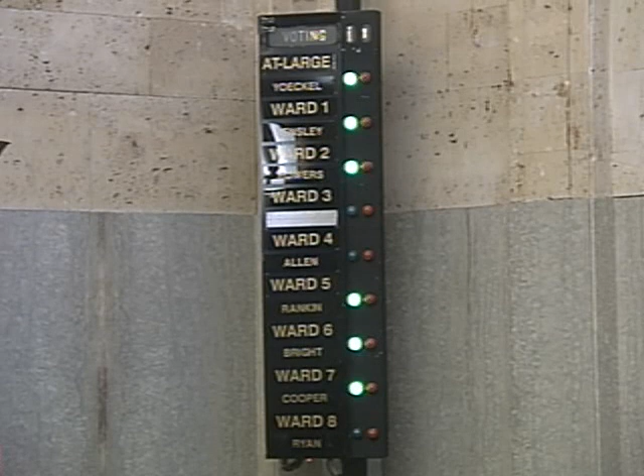We've also received 3 new requests for continuance: item B9 for SPUD 966 to be withdrawn, item B10 for SPUD 967 to defer to August 24th, and item B14 for PUD 1645 to defer to June 8th. Is there anyone who came to talk to us today about items 9, 10, or 14 on our agenda? Move for continue. Second. We have a motion and a second to approve the additional continuances. Cast your votes, and those are approved.

Are there any continuance requests from the public today? If not, we'll go to the consent docket, and if it's agreeable with the commissioners, I'd like to include item 5 in the consent docket. As I read the case, it's probably where it should have been. Do you need a motion to do that? I've got a question on item 1, 3, and 5.

It's a clarification, and I think it'll all go smoothly, but I've got a question on those 3. I'll move case items 2 and 4. The consent docket is now items 2 and 4. I'll take a motion. Move approval of 2 and 4. We're voting to approve 2 and 4. Cast your votes. Those are approved.

Back to number 1 for Mr. Bright. Is the applicant here? Item 1 for the record is C6896, the final plat of Cedar Ridge at Morgan Creek, Section 3. Good afternoon, Kendall Dillon with Crafton Tull, representing the applicant. This is about the 4th final plat. It conforms to the preliminary plat, we agree with the TEs, and I'll answer any questions.

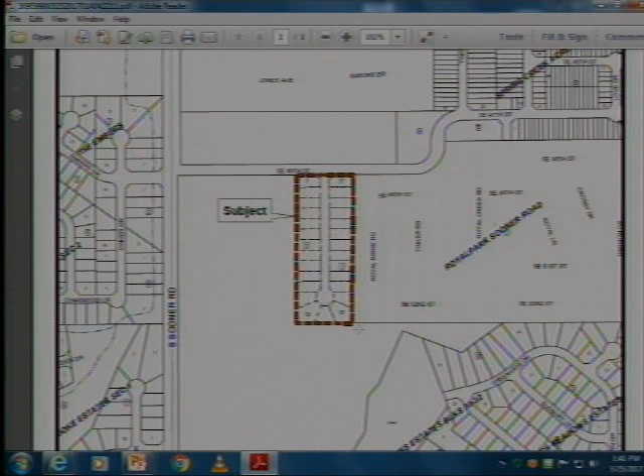Okay, I'm going to break my own rule here. I have just a comment to make. I'm a little concerned about the number of these single strip, cul-de-sac subdivisions that we're seeing. I don't think we ought to get in the habit of that, for what it's worth. I don't disagree. I mean, it's just a strange piece of dirt to be turning into a subdivision. Nothing prevents it in the subdivision regulations or the zoning ordinance, however, so as Terry knows, other than saying it's not what we'd like to be seeing, we're going to see some of them as people have these kinds of lots.

It does not require a variance, is that correct? I move approval. We have a motion and a second to approve item 6. Cast your votes, and it's approved.

Thank you. Item 7 is SP 492, a special permit application for a telecommunication tower at 6420 North Meridian Avenue.

Good afternoon. Tracy Malone, Falcon Foster, here for U.S. Cellular. Thanks for continuing this matter to today. We now have the FAA determination of no hazard to air navigation. The FAA has reviewed this proposal and deemed it appropriate. We don't have any lighting or marking requirements for this one either as it relates to the FAA.

This is an application for a special use permit because we need an exception to the wireless ordinance to install a 100-foot wireless tower approximately 250 feet away from an existing 80-foot Crown-owned tower. The Crown-owned tower has an available attachment height of 60 feet. U.S. Cellular needs 100 feet. So this is an exception to the tower-to-tower setback.

Currently, U.S. Cellular is operating a rooftop antenna facility across the street at Lake Park Center. U.S. Cellular needs to relocate to meet updated FCC requirements for its operating license. These updated requirements are Lake Hefner and Highway 3 data coverage. Staff has asked for proof that the Lake Hefner and Highway 3 coverage can't be obtained at the Crown-owned tower, so I've provided that in the materials before you and in the record.

Essentially, the proof is the top position of 80 feet on this Crown-owned wireless tower that exists is occupied, and the top position available is 60 feet. So that would be a 60-foot attachment height for U.S. Cellular, 40 feet less than what they're asking for. It offers 25%, or one-fourth, of the coverage that the 100-foot attachment height pole would provide.

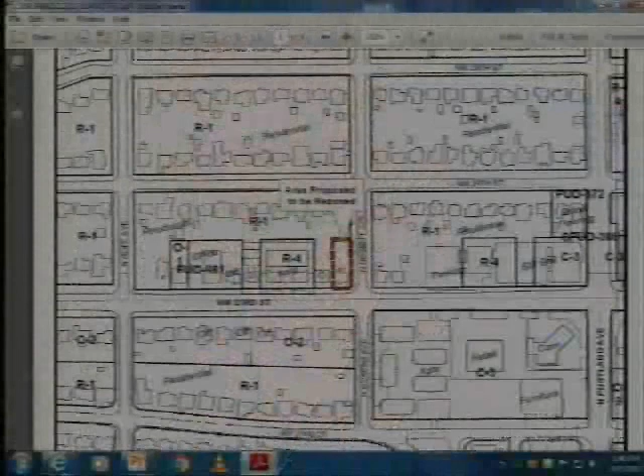My name is Flori Quiros, and I have a renting house. I want to transfer to a small business, like a barber shop and office renting.

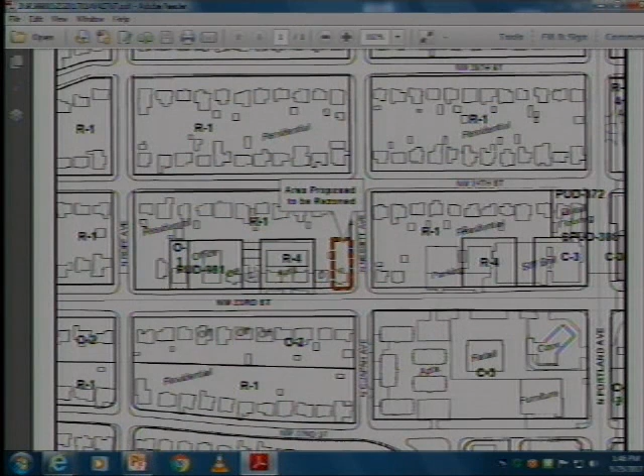Janice, do you want to weigh in on this? I met with Ms. Quiros, and we've gone through her application. We're going to make a few changes to it. We're going to narrow the uses to just two: convenience sales and personal services, further limited to a barber shop,

and administrative and professional offices. There's going to be only one point of access onto Nesbitt Avenue per the TE, and there'll be just one non-illuminated accessory sign, not to exceed 100 square feet, that will not be on the Nesbitt Avenue frontage. And she will install an 8-foot-high sight-proof fence along the northern boundary of the property. I have those for you if you need them.

I'm not a big fan of residential conversions. I really wrestled with this one. Staff was very helpful, and we talked through some limitations that would make it more palatable. The location is very specific — she owns the property next door to the west and lives there. So where it is situated, I'm hoping it will not be a domino effect along the north side of Northwest 23rd Street the way the south side is.

So with those changes, which she's agreed to, is there anybody who wants to be heard on this subject? No one has signed up.

Janice, the two uses are limited to what? To convenience sales and personal services, further limited to a barber shop, and then administrative and professional offices.

Tim Johnson with Johnson Associates, here on behalf of the applicant. For those familiar with this area, this is the ongoing renovation of the Page Woodson area. The tract to the east of this subject tract is under construction and reaching completion of units that are multifamily units specifically designed for the college students at the medical center. And this PUD, or SPUD, is a mirror of what's been approved on the other one.

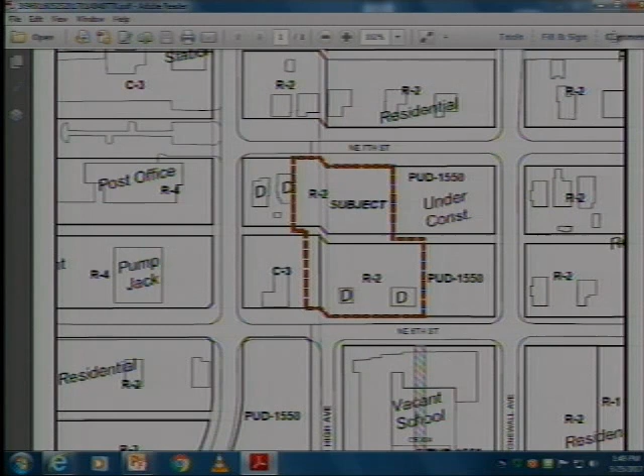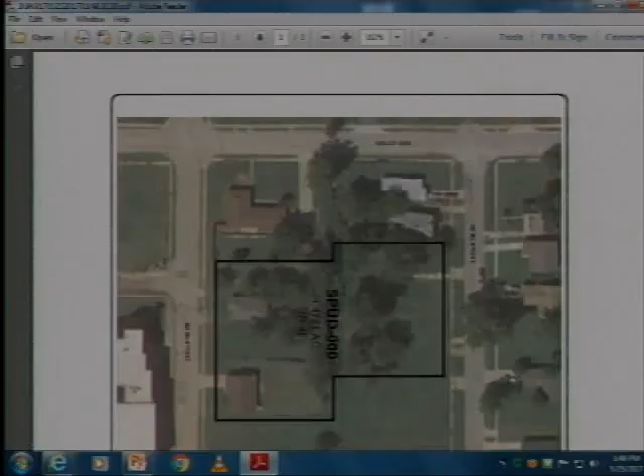Councilman Cooper had asked about why we didn't include the lots west of us in the north half of the block. Something we did when we first started and rezoned the original plat or parcel was agree that neither the developer nor urban renewal would approach any neighbors. The development of this tract came about because two neighbors — one was in probate and the other an elderly woman who wanted to sell — approached us, and we were able to negotiate and purchase the land between urban renewal's properties. So it allowed us to collectively put this together and expand the project.

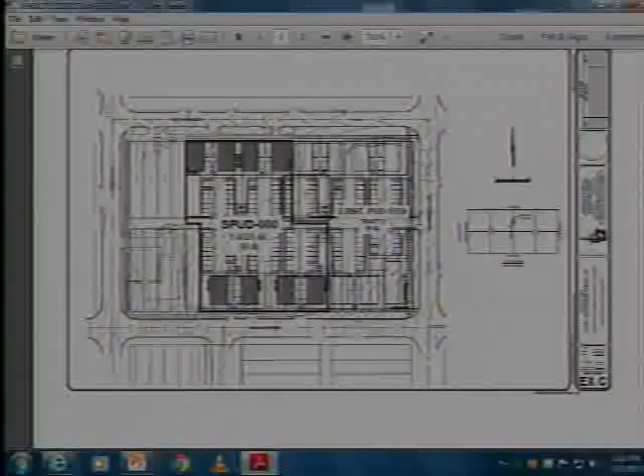The one thing I'll point out is that one of the points staff made is concern about landscaping. We do plan heavy landscaping on these — we've hired a landscape architect, and he's working on this Phase 2 now. The permit for Phase 1's landscaping has been submitted to the city and is under review. And as you know, that construction is going fast.

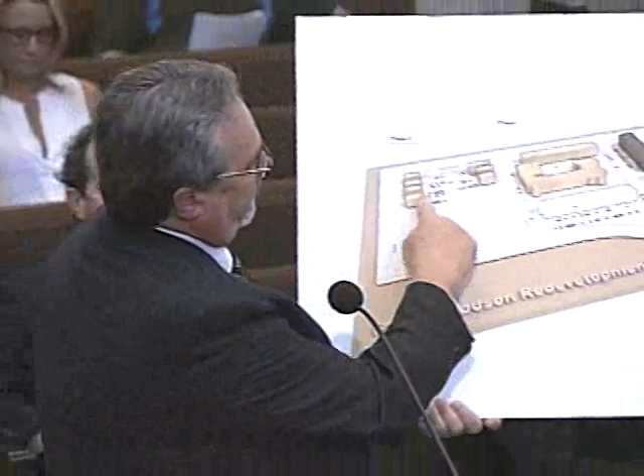It does fit into the overall master plan that was in the original zoning. This plat parcel, which is the phase under construction, and all of this was under the master plan of the original PUD. So this piece is filling in this portion of the block.

The height of our building next to the residential meets the two-story height limitation of 35 feet, measured to the midpoint on the roof. So we're not really any different than if somebody wanted to build a two-story house there. And I agree with all the TEs that are in the report.

Is there any limitation on the commercial uses, that they be accessory to the residential development? Some of the uses are not things I would want to see built there independently of this kind of residential use. That's a good question. I think the intent, and we did mirror this, and I probably should have taken those commercial uses out, because there's no commercial planned in this phase. The only commercial was in the previous phase, in the corner building on the southeast corner, in conjunction with the rentals.

So can we take them out now? We can take them out. I like that idea.

I think this is a really, really needed and good project, particularly for this area, which is still redeveloping. Tim and I discussed the uses, some of which I would not have wanted to see, but I don't exactly know how all of the area is really going to end up developing. I thought it would still be a good project. So I'll move for approval.

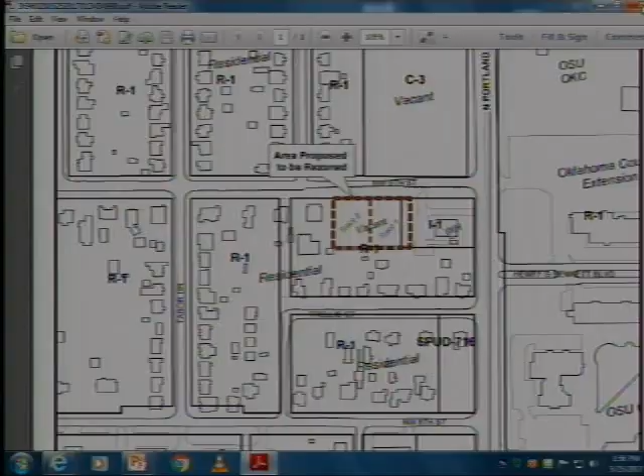Yeah, they all are. No one has signed up. Second. We have a motion and a second to approve item 12. Cast your votes. And it's approved.

Thank you, can I ask one more question? I had the neighbor call me, and he was not opposing this, but it shows that at some point there was an area to be vacated to widen that road, and I guess OSU was supposed to do it, and it's never got done. I think that was his only concern—he wanted me to let everyone know he wished it would get widened. Well, thanks for pointing it out, but we'll leave it to staff to solve.

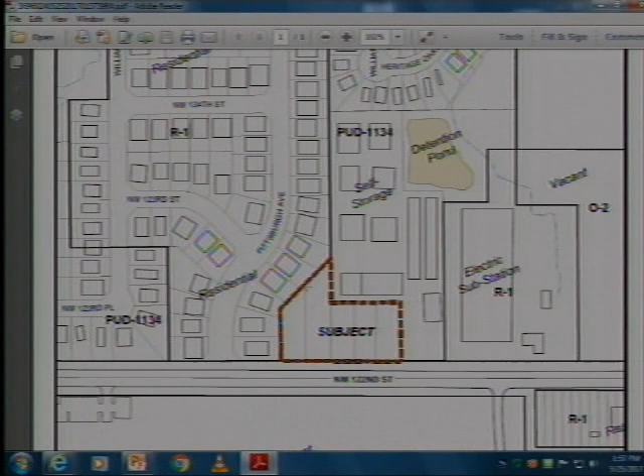Item 13 is SPUD 980, to rezone 1409 through 1425 Northwest 122nd from PUD 1134 to SPUD 980. Good afternoon, David Box, 522 Colcord Drive, here on behalf of the applicant. This is a spud on Northwest 122nd Street between Penn and Western. What we've provided for is a C1 base with limited uses. There are two TEs, both of which we agreed to.

We've got a tract that's kind of in an odd spot because we've got an electrical substation to our east, personal storage to our north. Obviously, we can't have any residential fronting on 122nd Street, so what we're trying to do is provide some limited commercial. We think we've done that with the limited uses in our spud. So we agree to the TEs, and I'd be happy to answer any questions.

Commissioners? No one signed up. Move approval. Second. We have a motion and a second to approve item 13. Cast your votes. And it's approved.

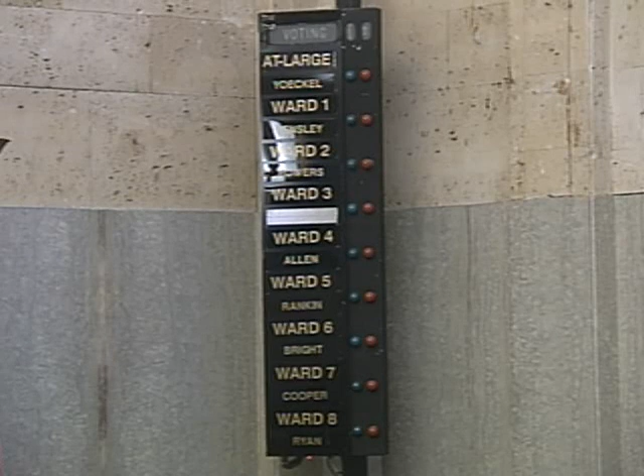Thank you. Item 14 was continued. Item 15 is a comp plan amendment, 2017 number 4, to change the land use typology from rural low intensity to rural medium intensity, northeast of North Douglas Boulevard and East Memorial Road.

Hi, good afternoon. I'm Ken Bryan with the Oklahoma City Planning Department. I want to walk you through a couple of the pertinent items from the staff report on this requested comprehensive plan amendment.

As the title indicates, we're looking at going from rural low to rural medium, and there's an associated rezoning for RA2.

Taking a look at our land use typology map and providing a little context of where we're at, we're way up here near Lake Arcadia, actually adjacent to the city of Edmond, just north of the Turner Turnpike.

Here's a look at the site in some detail. It's about 130 acres in size as far as the comprehensive plan amendment area is concerned. It includes out to the center of Douglas Boulevard and to the center of the turnpike there to the south.

We'll look at some additional details that are pertinent to this site and its given land use typology. So the site's designated rural low. Rural low is appropriate for large lot rural subdivisions, 5 acres and larger in size typically. A limited amount of commercial, light industrial, and ag uses are also appropriate here.

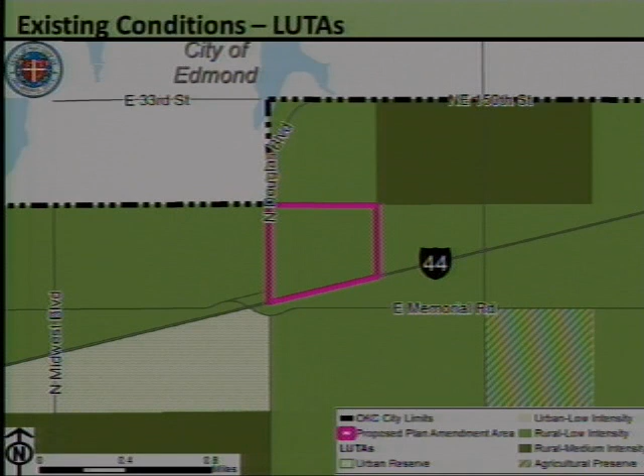That contrasts with the rural medium intensity in terms of the lot size. Rural medium allows for slightly smaller lot sizes down to 2 acres, and we like to see those near a fire station. If you're going to put more lots and more uses, it would be good if those had more access to fire, and we actually have a rural response time map for fire to take a look at.

The site's mostly covered by upland forest. Upland forest is one of our environmentally sensitive areas in Plan OKC. There's provisions in the plan for taking care of the forest and preserving those as appropriate.

Sites or specific land use in the area - there's rural residential on 2 sides. There's a lot of undeveloped tracts out here that haven't been platted or divided into lots really in any way, which you would think is expected given the rural nature of the area.

So looking at major services, of course it's rural, so there's no immediate access to public water or wastewater, and it's beyond the preferred response time for rural areas of the city. Let's take a quick look at that - it's an important component of this area.

I had to zoom out quite a bit here so we can see these 3 fire stations. It's about equidistant from 3 fire stations, winding up being a little over 6 miles from each one. So you're in that red zone there that is outside our response time target for rural areas. The orange is the response time target for rural development in Oklahoma City.

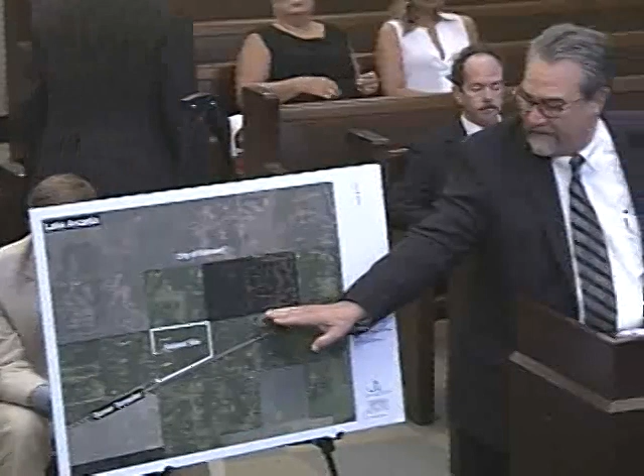So as Ken showed on his map, this is medium now. This is where that project I just mentioned is, there's 160 acres here. This is zoned to be 2-acre tracts. It was zoned much longer before we did this. Our subject tract is in between medium and an urban reserve over there, that triangle south of the turnpike, which is a little unique because there's no sewer or water over there.

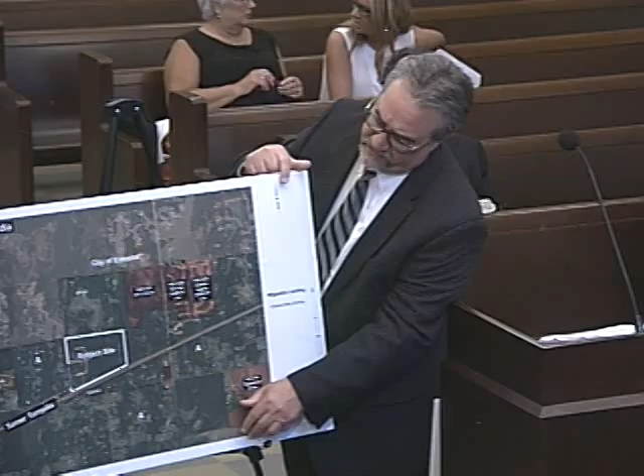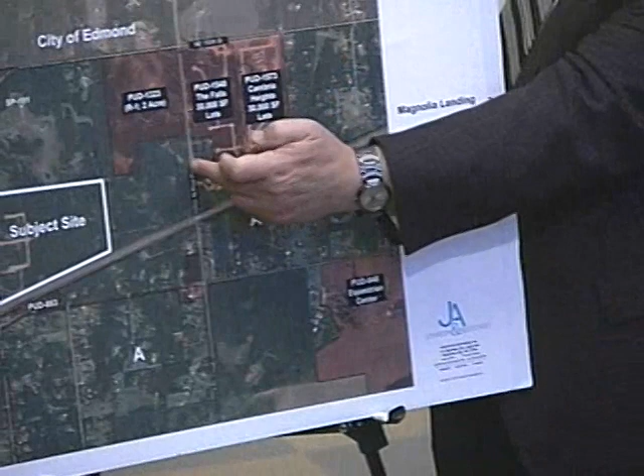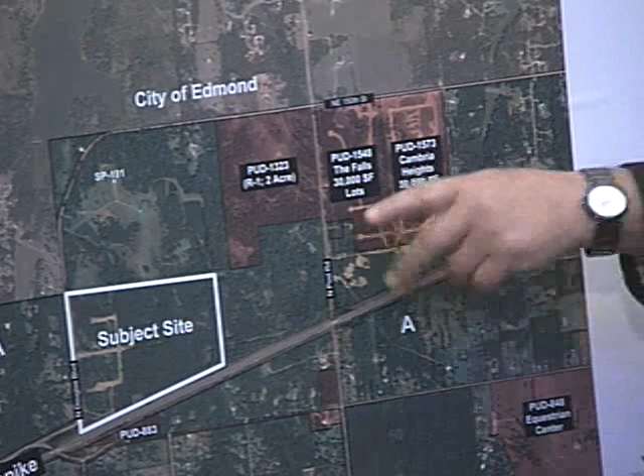So the zoning pattern in the area, and again right now I'm just talking about Oklahoma City, as you can see there's been a lot of PUDs. The area I was mentioning, there's a tower right here. There's public Oklahoma City water here, connected to the Edmond treatment plant through an agreement the city did a number of years ago. The PUD across the way is older, but there are small PUDs all over the place here. There's an RA zoning over there. And here's how it impacts what we think the change that should be made in this area.

So what you see on this map is we've included Edmond because the development around Lake Arcadia under Edmond criteria is 2-acre subdivisions. We're proposing a 2-acre subdivision. The area over here where the public water is in blue, those are 30,000 square foot lots, and the reason they're so small is because there's water there. This area over here has actually, it's one of the old cluster zonings because it has densities that can be as dense as R1, as I believe it's written, but it's an average of overall 2 acres.

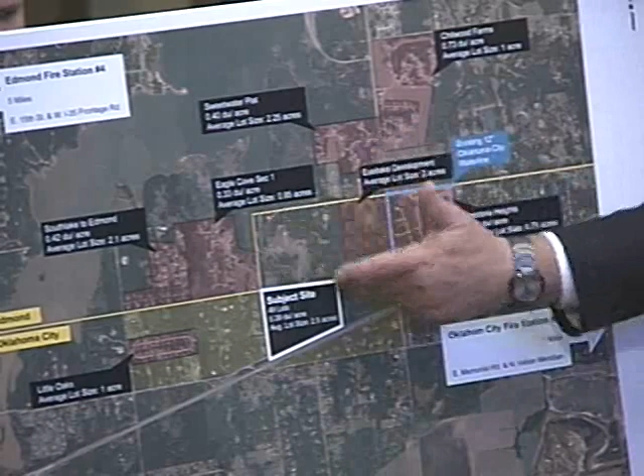All these developments north of the city limit line are all 2-acre subdivisions that exist today. The area in yellow is fully developed, was developed a number of years ago, those are 5-acre tracts. This is the only piece undeveloped between 2-acre developments surrounding it. We believe the development pattern out here is very distinct and very much developed. This is developed, this is developed. As you go that way, there's much smaller lots developed. So this is really the only area that's, in my mind, a question, and part of that is already medium.

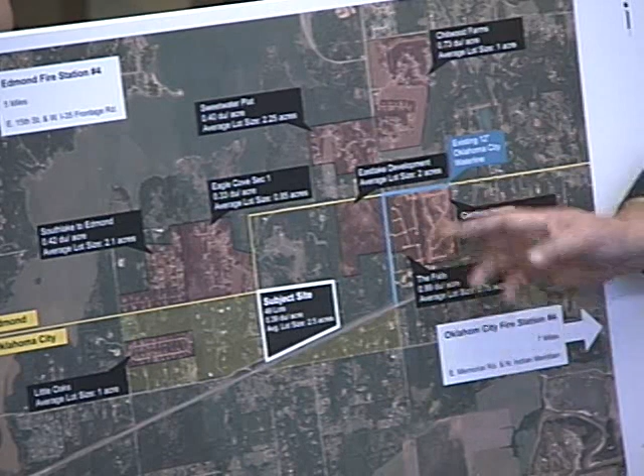We believe not only would the plan need to be changed for this tract, but I think this is an up-and-coming development tract as well as this. More than likely, you'll see an application on this for 30,000 square foot lots because it's abutting a water line that's already been built, and Oklahoma City is maintaining that. So that's kind of the basis of our case.

The other things staff has expressed concern about, and the OKC plan covers, is that we're concerned about this forestry area, and we've taken that into consideration. Although we're asking for a straight RA2 zoning, our developer is committed to putting covenants as well as notes on the plat with regard to how much you can clear on your lot, and intends on enforcing that. Those of you familiar with Stone Mill, I developed that with David Yost many years ago, and we've maintained that streetscape provision, and that's what this developer wants to do.

We're not going to tear out trees 60 feet wide to put a street in. We're going to tear out just enough room to put the street in. There won't be any water or sewer, so we're not going to take any trees out for that. All public utilities will be in the street, so we can minimize the damage we do to the trees and the forestry there. What the OKC plan aggressively asks for on 100% covered land is to maintain 60%. We are, with this plan, using a 40% lot coverage, which is high. We can maintain just a little over 60% of that.

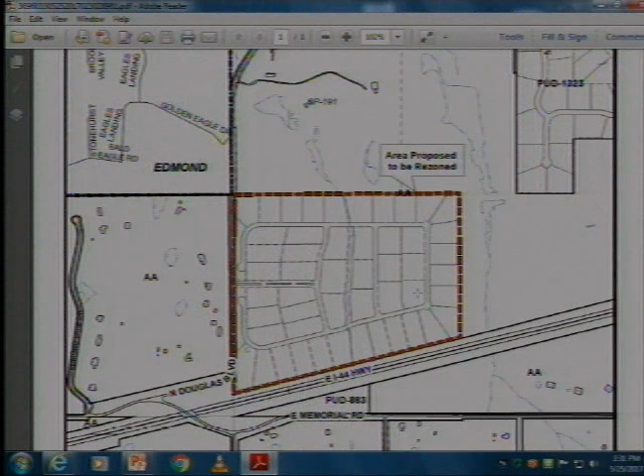Is that the legal property adjacent to this one, that may be in question about the boundaries? Yes. On the north side of the proposed subdivision, my client, Yellis Family Trust, owns the property immediately north, and there's a dispute not yet resolved. We filed suit to try to resolve it, but my client doesn't want any part, whether it's a 10-foot strip or a 100-foot strip, rezoned. We get the point. Thank you.

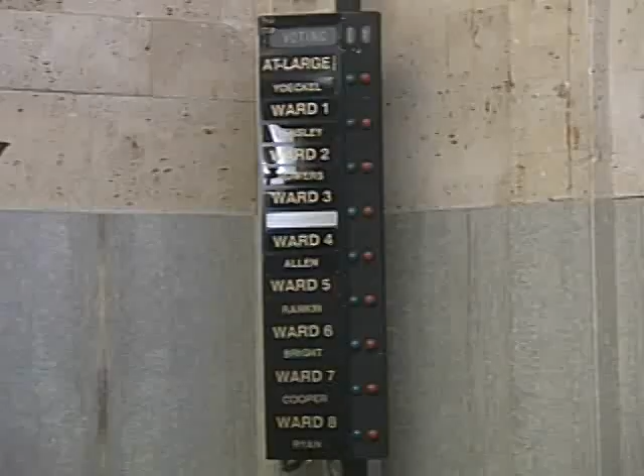Make a motion to deny. Second. We have a motion and a second to deny item 16. Cast your votes. That's denied.

Need a motion on item 17? Also making a motion to deny. We need to continue the plat, since it's not valid without the zoning. So we'd like to put it on indefinite continuance. We'll continue indefinitely so we can get new notice out. Second. We have a motion to continue item 17 indefinitely. Cast your votes. And that's approved.

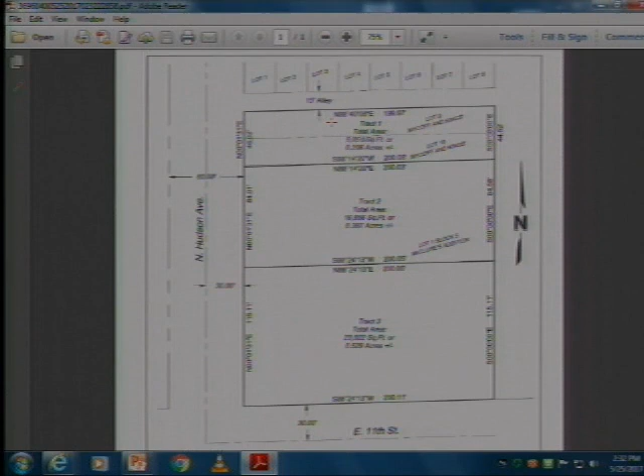Item 18 is V16, a variance request to extend a water main to a property located at 1204, 1210, and 1214 North Hudson Avenue. Is the applicant here?

Is there any reason why we would continue this? No, and no reason we would deny it. No reason to deny it. I'll move approval then, approval of the variance. Okay, we have a motion and a second to approve the variance to item 18. Cast your votes. That's approved.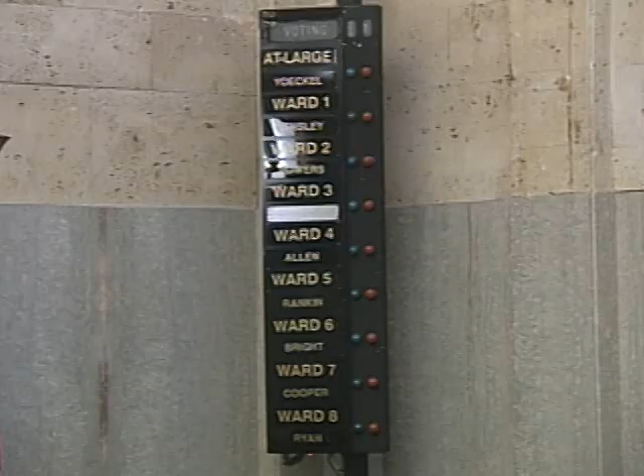And item 19 is case C6888, the final plat of Ashton Court, Phase 1. Hi. Didn't know I'd be back so soon. You missed me. Yeah, this is the final plat of the first phase of Ashton Courts.

We've mimicked the preliminary plat and agree with all the TEs. We've been working with Public Works staff on a resolution to the sight distance solution, and we've come to an agreement on that just today, so we're thrilled to put this forward. We've agreed with Public Works that we'll present our final resolution per their comments on our paving plans for final approval by Public Works on paving.

But we're leaving the TE in for now, right? I think it stays, that's fine. I think so, because we'll resolve it under... are you talking about TE4? Yeah, you can leave it. Yeah, that's what was just said.

And we don't have to worry about the variance that was provided earlier in the preliminary plat, do we? Access to Sara Road? That had to do with the separation. Yep, okay, that's what I thought.

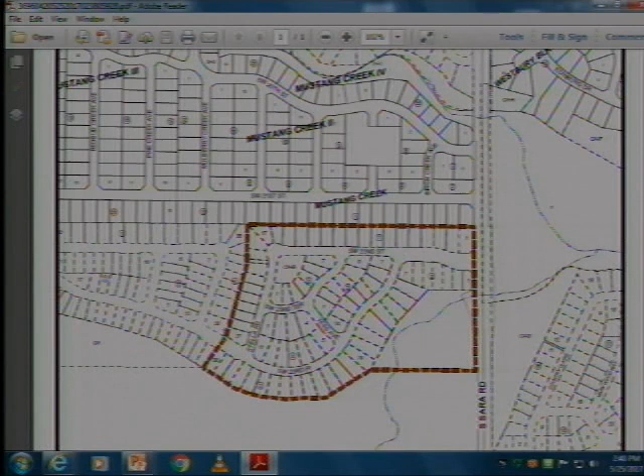Commissioners, any further discussion? Motion? I move approval. Second the motion. Okay, we have a motion and a second to approve item 19. Cast your votes. And it is approved.

Item 20 is a resolution of the Planning Commission approving the proposed 2017 General Obligation Bond Program. I'm going to take you through a presentation that may look familiar from our previous study sessions, but for the benefit of the public, this is one of the first steps in the official approval process for the 2017 GO bond.

I just wanted to show you a project planning timeline you probably haven't seen before. Although the city has been preparing for this 2017 bond issue for quite some time, in earnest last summer we began exploring ways we could reach out to the public, have a public input process, and start preparing lists of needs for the city, including input from the community, planning commissioners, city council members, business owners, and all of that. This outlines all the major milestones in the planning over the past year that have gotten us to this point today.

It did include lots of different opportunities for engagement, and we ourselves have been talking about this in study sessions for the last month or so. Next, to summarize the public outreach process: we had many opportunities for public engagement, online opportunities, in-person opportunities, and surveys that people could submit. In all, we had about 6,400 people participate through all of these various methods.

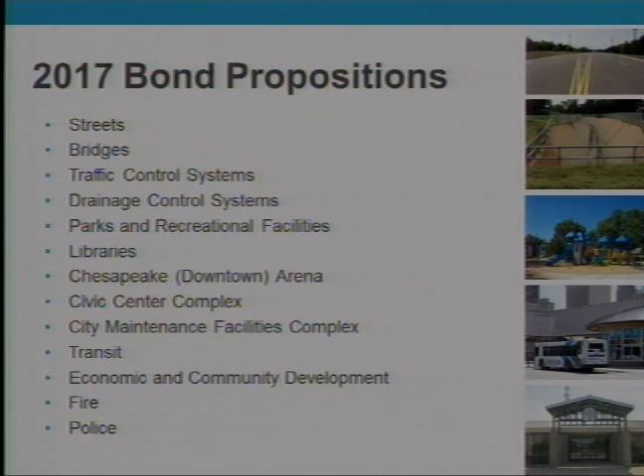Speaking of the prioritization system for taking all of those proposed projects from the community that everyone's been collecting over the years, we put together a methodology for sorting the projects. We had the ability to use a lot of technical information and our geographic information system to put projects into sequence and order and review them by specific criteria.

These criteria included data that we already knew. For example, when we look at streets, we have a pavement condition index rating that tells us how the condition of that street scores. That methodology was applied to all of the areas of the city where we felt street resurfacing projects could benefit the community. Then, by ranking those, we could see how far the funding would go down the list.

The other piece that we applied to this methodology was our comprehensive plan. The comprehensive plan, which was adopted in July of 2015, has a chapter that talks about capital improvements investments.

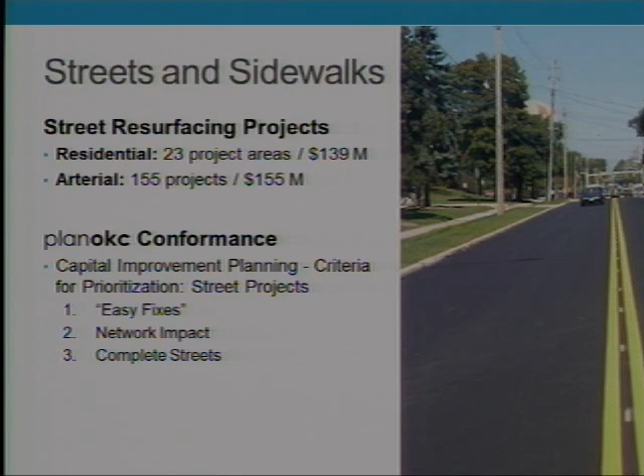We're also able to impact the overall transportation network, and we're able to rethink how streets might be designed to be more in conformance with the comprehensive plan, looking at opportunities to restripe those streets that are resurfaced to include things like a bike lane, if it's designated for a bike lane in Plan OKC.

So it gives us opportunities to implement the plan. The next subcategory of streets is street widening projects. There are 17 street widening projects.

Most of these street widenings address some of our capacity issues in Southwest Oklahoma City. As you know, Southwest Oklahoma City is long overdue for looking at this in terms of growth management. We also have an extension proposed to the Kilpatrick Turnpike, which is going to impact capacity issues of our arterial network getting to and from the turnpike. When we look at Plan OKC, again, those same criteria for prioritization would apply to this.

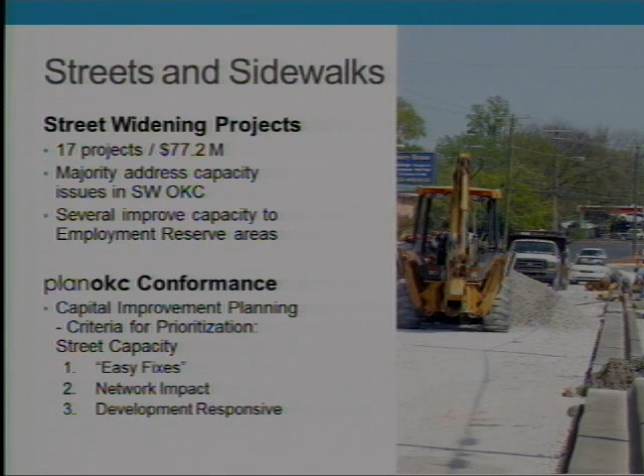The next category is street enhancement projects. This is a subcategory that includes streetscape improvements plus all of our bicycle infrastructure. So this category includes multiple projects across the city that help us implement the draft pedestrian bicycle plan called Bike Walk OKC, through establishing bike facilities in certain areas and establishing a crosstown bicycle corridor, which is a very important function to implement that plan.

We also are in the process of wrapping up some area plans in the Windsor and West 10th districts, and streetscape improvements were one of those recommendations of the plan that it helps capture. Also targeting some streetscape investments in our strong neighborhoods areas and commercial district revitalization areas, as well as Classen Boulevard, which was subject of a study by the Urban Land Institute that made recommendations to that important commercial corridor. So this subcategory of streets really does hit on a lot of specific comp plan goals and priorities.

Sidewalks is another component of the streets proposition. Sidewalk projects, there were 20 different projects. Some of these projects are very large in scale that can, even though the number 20 doesn't seem like very much, it actually does build sidewalks across Oklahoma City.

15 of those sidewalk projects do help implement the priority projects that are listed in our pedestrian bicycle plan. That plan was developed with a lot of public interaction, public outreach. We did a lot of analysis on how to make our sidewalk system the most efficient and connect to vital places that people need to go. Some of those sidewalk projects do help make areas ADA compliant, and some of those projects came directly out of the community. So when you look back at Plan OKC conformance, that responsive population and connectivity, all of those different points were hit with all the sidewalk projects that made the bond list.

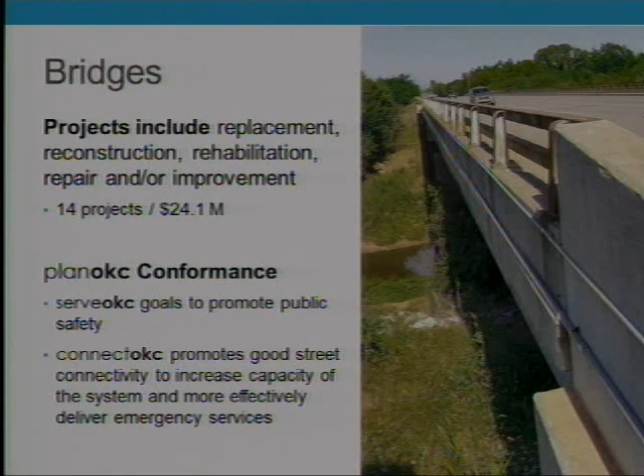Next is bridges, and this is one of those categories where some comp plan conformance statements were easy to make and some really don't have a real direct connection to Plan OKC, other than as we do bridge improvements, these are going to be in areas of great need. So this will help promote public safety, will help with connectivity. So when we look at comp plan conformance, we are getting 14 projects for bridge improvements at $24 million, and that does help connect places and emergency response where they need to go.

Traffic improvements, this also is something that helps with the overall network impact. So the traffic improvements includes 20 projects at $24.8 million. Our transportation element of the comp plan promotes that we can get people around, deliver services efficiently, and get emergency services throughout the city. So this will be able to provide new traffic signals, traffic signs, and devices at intersections, which help manage traffic flow.

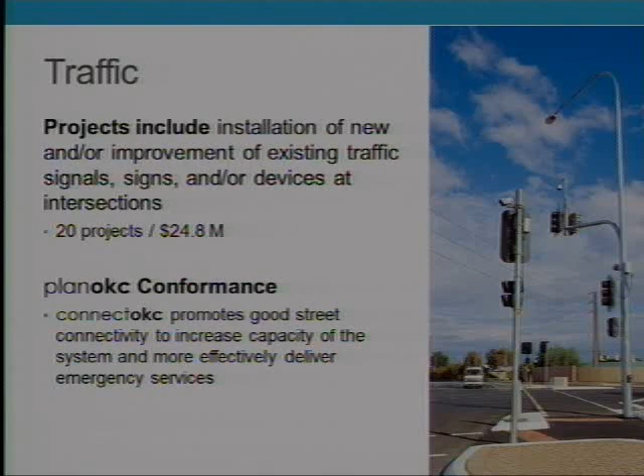Drainage projects, there are two different types. Some are just general drainage improvements, and some are stormwater quality control improvements. Again, drainage improvements were things that were dictated by flooding incidents and costs going into remedying those. So the worst places in the city were able to be addressed through these 17 projects. Again, in terms of Plan OKC conformance, we look at minimizing damages and maximizing resilience for emergency response, which this can address. We also have a citywide hazard mitigation plan, and it does encourage better stormwater management. So the funding that can go to stormwater quality control through the bond issue is able to implement that plan.

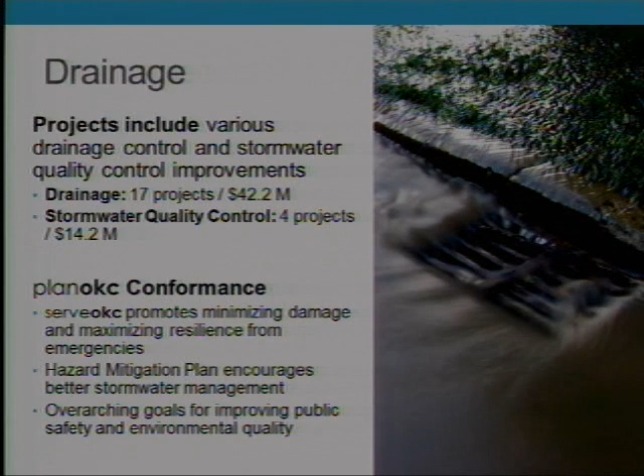The next one is Parks and Recreation. This also includes trails. So parks projects, there's 19 projects at $119 million and 5 trails projects. These projects were driven by the comp plan's Parks Master Plan component. A lot of public feedback, public input went into creating this list for parks. So all of the criteria that were under parks in the checklist for Plan OKC really have been managed to be made through the Parks and Recreation Bond project list.

Police and fire facilities. Police and fire are coming together to share the cost of creating a new police and fire training center, and doing some improvements to existing fire and police stations. With Plan OKC, Serve OKC, which is the public services element, promotes improving public safety, efficiencies, and levels of service, which these projects absolutely will do.

And libraries. There are 4 projects proposed for libraries at $21.5 million. These projects will help improve some existing libraries.

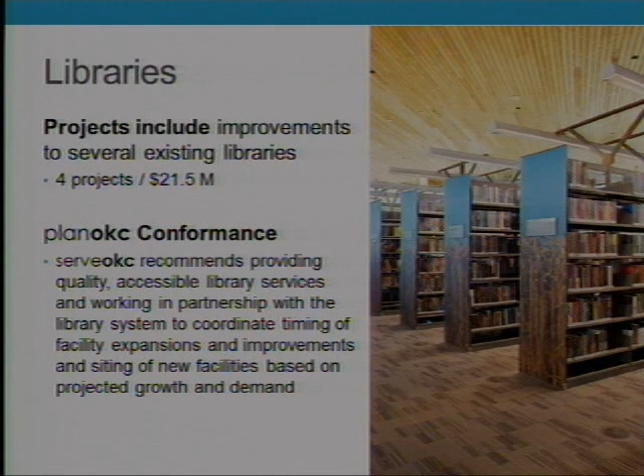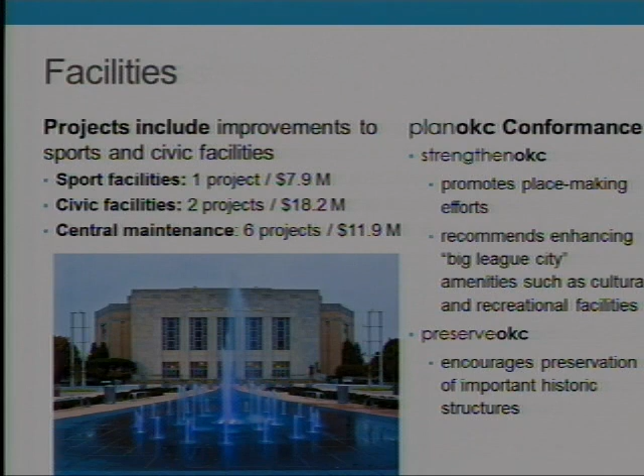City facilities is broken up into sports facilities, civic facilities, and central maintenance facilities. Plan OKC conformance really has several points this helps facilitate. The economic development element promotes placemaking efforts and recommends enhancing big league city amenities, and the historic preservation element encourages preservation of important historic structures. One example shown here is the Civic Center, which would get additional improvements through this bond issue.

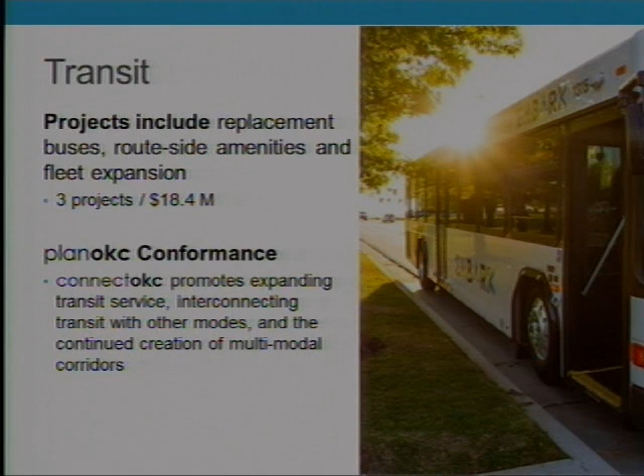Under the transit proposition, this would fund the replacement of some buses, provide route-side amenities, and fleet expansion. Again, the transportation element of Plan OKC promotes expanding transit service, interconnecting transit with other modes, and continuing to create multimodal corridors. So the bond issue will help achieve those goals.

Economic development, or the GOLT bond, can be used for community and economic development. The proposal is to establish $60 million worth of incentives for job creation and affordable housing. In Plan OKC, the economic development element and the neighborhoods element encourage establishing new or expanding existing financial incentives for the development of affordable housing. The economic development element also specifically encourages the strategic investment program to continue, enhance, and encourage economic diversity by prioritizing incentives to targeted industry clusters.

So that couldn't be more specific that this is something the comp plan encourages this tool to be used to do. With that, we've reviewed the projects, provided you with a project list, and I believe you had some questions too about sidewalk connectivity to amenities like schools, which we provided you additional information about.

Today, what we're seeking is a recommendation that these projects are in conformance with the plan. The next steps would be that your recommendation would be carried to City Council. There would be a series of meetings at City Council, an introduction on May 31st, a public hearing on June 13th, and then Council is anticipated to call the election at their June 20th meeting and set it for September 12th, 2017. With that, I'd like to open it up for your discussion, and we have staff here to answer any questions you might have.

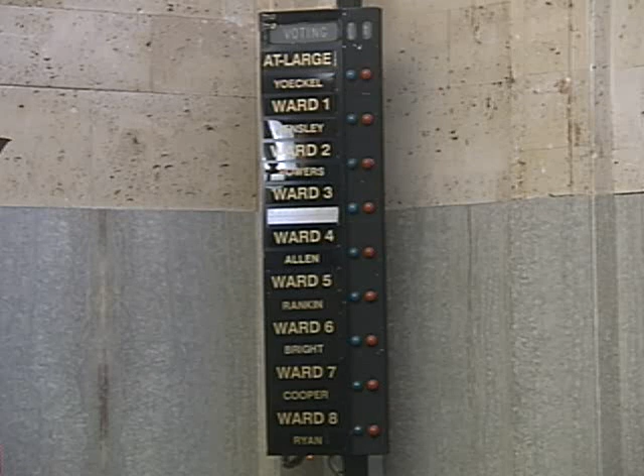With that, we need a motion for a resolution of the Planning Commission to approve the proposed 2017 general obligation bond program. So moved. Second. Okay, we have a motion and a second to approve item 20, which is a resolution. Cast your votes. And that is done.

That ends the individual items for individual consideration, and the next thing is election of officers.

Mr. Chairman, I would like to nominate Janice Powers as chairperson, and Mike Hensley as vice chairman, whose terms will commence on the morning of June 9th, 2017.

I second the motion. Oh, and it's permissible to vote for yourself. I think you have to. Yeah, I say, you're going to have to.

We have a motion and a second. Is there any other discussion? Cast your votes. Congratulations. And thank you for your service.

Item 22 was continued. So we're to Planning Commission members. Any discussion or comments? I would like to bring up again the issue of traffic calming. In the newspaper a couple of days ago... unfortunately Eric just walked out. But, well, Eric.

Well, John, this is in your history. The folks in Heritage Hills are trying to put stop signs at every intersection because of the traffic. You were instrumental years ago in calming traffic in Heritage Hills to a certain extent, but now the traffic is going crazy because of Midtown development and all the other stuff going on. I think this needs to be prioritized and brought up.